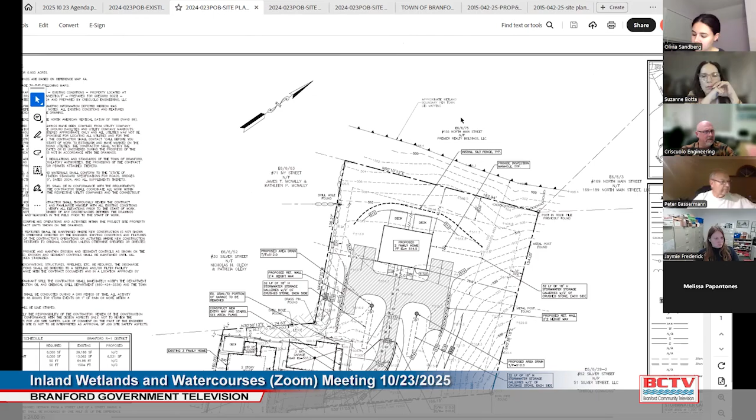The wetland is off the property, down at the bottom of this hill. That's the Premier Subaru site, I believe.

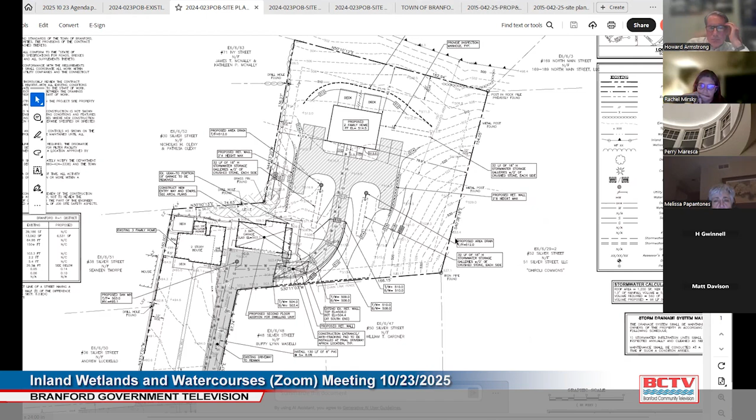When I was looking at this today, the house and the new driveway with those turnaround pads are built in the flat part of the area, and it looks like the surrounding terrain on both the west and east side slopes down to this area. So previously, when the garden was there and nothing was built, rain would go downhill and settle there, and now there'll be impervious surfaces where once there was infiltration.

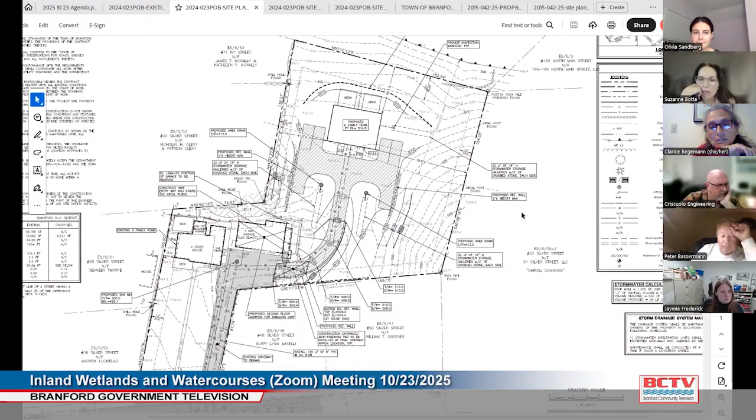I know you have the 3 infiltrators. My concern is just that there may be a little bit of increased runoff with steepening the slopes at the base before it gets to the driveways, and now that the previous garden area isn't absorbing water, there may be more water than before that won't be infiltrating much. Then you add the driveway and the roof. I know the 1.3 inches requirement is met, but I just have concerns about that amount of impervious surface there.

So this area, because of the slope—there weren't plans to remove all the trees up on the slope other than the one tree of heaven we saw. On this side, when you're looking at it, there's definitely a kind of ledge that goes up, but when we walk down in here, this property really slopes to the back, so it's not getting much of it. There's a stone wall here acting as a quasi diversion, so yes, there will be some water coming at us, but most of this will remain vegetated, so I don't think we'll get tremendous amounts. This was kind of a saddle, so some water was already going to the north and some to the south.

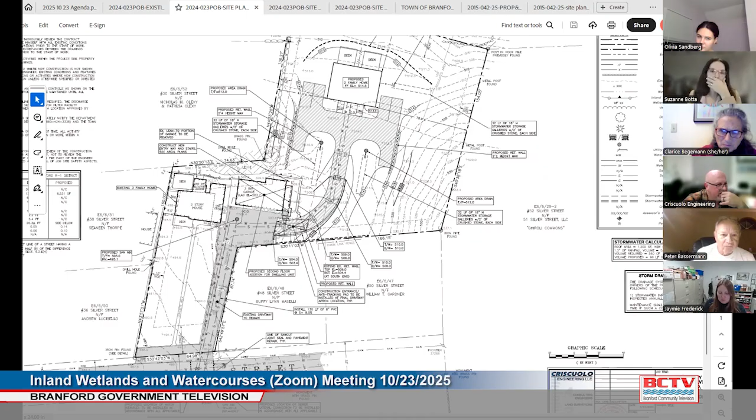As a follow-up, Commissioner Bassermann, is that the way you want to leave it, or are you thinking about something else? Well, now that I'm looking at these photographs again, I think I'm going to convince the owner to fix the gutters on the house, tie in the garage, and put something in the front yard over here. I just have to verify where the existing sewer lateral comes down from the house, but this is all lawn, so there's an opportunity to put something in, like an infiltrator situation, because I don't know how it hasn't been a problem, but eventually it will be a problem going back into the foundation.

Mr. Brady, this is Commissioner Botta. Going back to the northern part of the site - the silt fence that I'm assuming is the limit of disturbance, is that right? Yes, so after construction it's removed. There's two lines: a dash line past the silt fence, and then a heavier black dash line on the right corner that says post in rock pile. That's the property line - that's what I was going to ask. Correct, this dash line is the zoning setback line.

So I'm wondering if there is anything planned to ensure that the folks living there don't go beyond that - of course there are our regulations, but not everybody knows about them. There's not an intention to put a lawn or anything since you said this is the limit of disturbance, but I'm wondering if there's any other indicator that that's meant to be the limit of clearing.

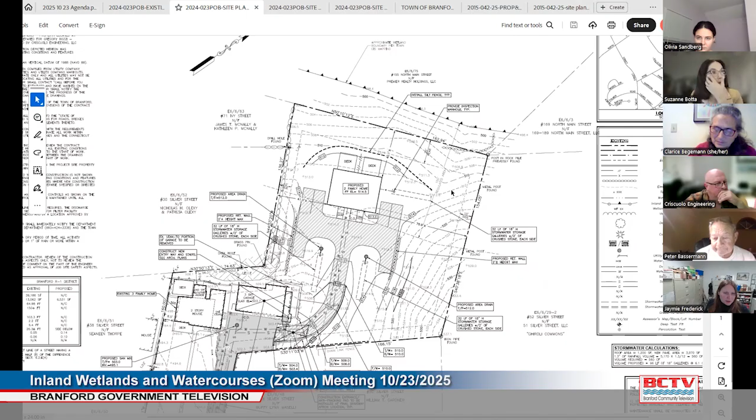I did have a comment in my staff report about the fact that no stockpiling was shown on site. I would add that stockpiling should be located somewhere other than where the infiltrators are proposed to be installed, just to make sure we don't end up with soil compaction.

I did not think to ask the applicant previously: has there been any infiltration testing on site, or do you know if those areas are likely to infiltrate? We have not been on site with any kind of equipment yet.

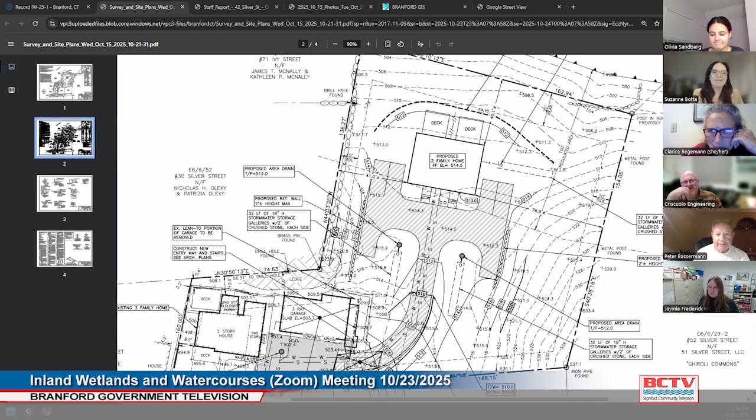You're not going to ask me how I know that? Mr. Peretti, this is Commissioner Botta. How did you know that off the top of your head?

So I'm sure most of you remember Don Blue. He actually went up to Tilcon and got 5-gallon pails of every different size stone and filled them up, measuring the amount of water that would fit in the pail to see that it was in fact the same regardless of the size of the stone. The difference was negligible. Awesome, that's a nice fun factoid.

This is Commissioner Bassermann. Jamie, is there anything in the staff report that you had prepared that might stimulate any other questions, as it looks like there's going to be a revision here.

Jaymie Frederick, the Wetland Agent. I guess the only comment was that we have the calculation for the 1.3 inch water quality volume, but we do not have stormwater calculations through the 100-year storm. That's not a default requirement for all applications, that's triggered by section 7.8 of the regulations. I got a comment from the town engineer stating that if the commission is requiring this for this application, he'd be willing to review it. So if you think it's required, we should let the applicant know. It's not a standard requirement, but one that we certainly would require for larger developments and larger impervious areas.

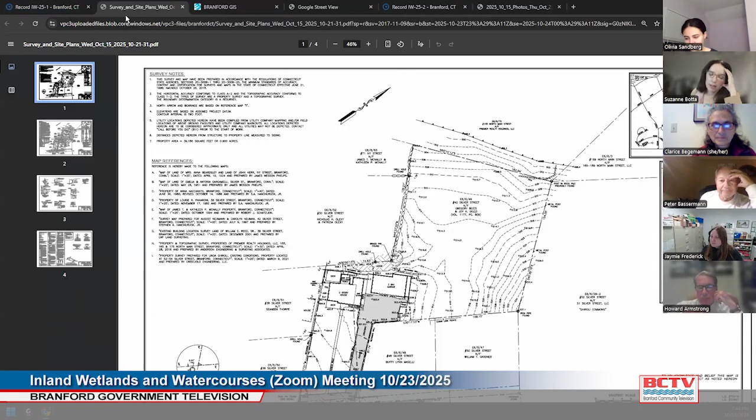Jamie, this is Commissioner Botta. As you're doing that, it's actually kind of helpful that we see you doing that, and maybe your thought process as you're looking for stuff. One question is, are those fields always in the same order, or are they in the order in which things were added?

That's a very good question, and it's kind of neither.

Generally speaking, some of the file types only populate when they're applicable, and some of them always pop up. Authorizations always pops up if the application was submitted via paper or if the applicant is not the owner of the property. Site development plans is always required, so you're always going to see that, near the top. Same with project narrative, it's always required, near the top. Property survey is always present as an option.

I didn't make it required because sometimes people lump all of their plans with their property survey in one spot.

Exhibit list is always there, but it's only used if we use it, usually on public hearing applications. Wetland report, again, always there. Drainage—so most of these, yes, they're going to be in the same order.

And if there's no file uploaded, that means nothing was uploaded to that location. If we add any additional things—I'm still kind of working on some of these. Now that we're actually implementing the system, I'm realizing some of them should be renamed. Like we don't need site walk photos and photos separately, so I'm just going to make one photos location.

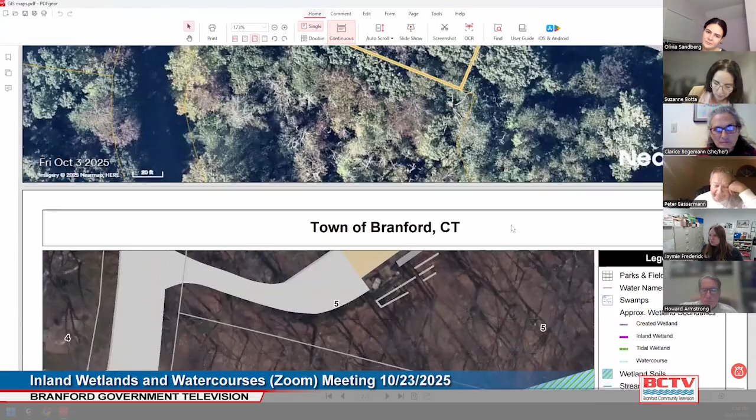Here's an aerial image from October of this year, pretty recent. You can see the lot is very well wooded. Next image from our GIS showing the NRCS wetland soil layer, which is obviously approximate. The house and the driveway in question to be repaved. I don't think this is a driveway. When I was out there, it was all vegetated. It looks like historically it's been disturbed, but it was vegetated when I was out there.

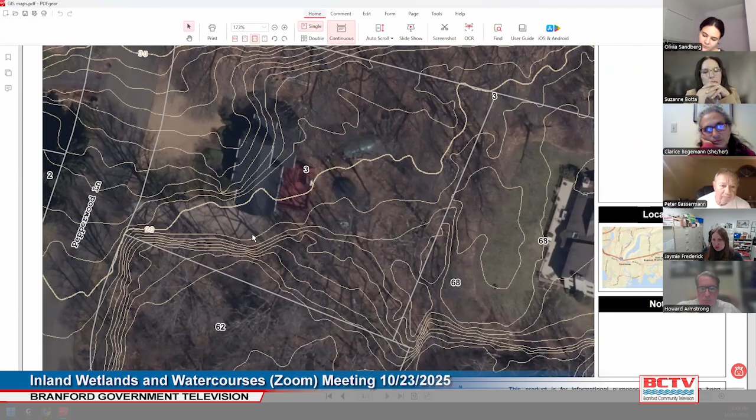So this is the driveway, and these are the 2016 contours. It does drop off fairly steeply. There's no space for them to put in stormwater improvements. It is an existing driveway. The level of impervious is going to change, the material obviously of the driveway is going to change. I don't really see much they can do to mitigate the change. So I kind of wanted to get the commission's feedback.

This is Commissioner Begemann. We know that the surface that's there now is better for the wetlands than a bituminous driveway. But what is our role in this case if a homeowner wants to put in something that we know isn't as advantageous to the wetlands that are right there?

Jaymie Frederick, the wetland agent. Generally speaking, I would look for some sort of stormwater improvement to at least improve the water quality, like maybe a vegetated strip, a rain garden, a bioswale, something to offset the change. There's really no space for them to do that without bumping out that slope and directly impacting the wetland. So it is, I think, a unique situation.

This is Commissioner Bassermann. Jamie, can you put the picture of the driveway back up? And the width of the existing driveway is what? Approximately, based on this, 15 feet wide at the front and then 28 feet wide in front of the garage.

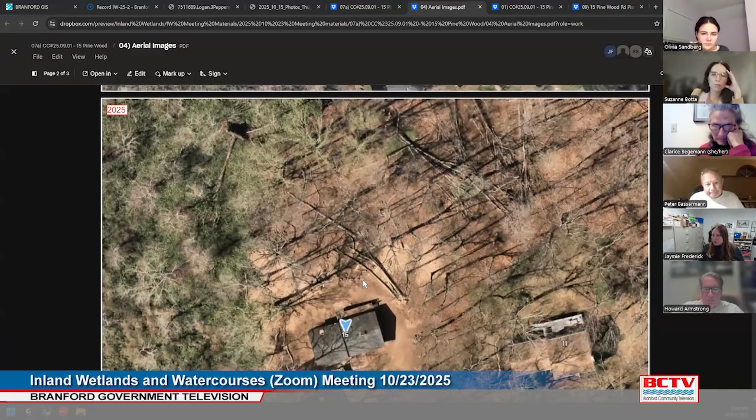Subject property, 15 Pine Wood. I believe this is from 2024, and then this was April 2025. You can see that there was some site disturbance, and here you can see some of the trees that were removed. The wetland is located to the west, off to the left in this photo.

I'm going to jump to the planting plan and show that. Then, unless the commission has any specific questions for me, I'll hand it over to the property owner to add anything they want to add.

I'm going to skip to the photos. Here you can see the silt fence at the limits of activity. Clearly they didn't clear cut up to the silt fence. They left mature trees and even some of the understory vegetation, so it's not a bare dirt scenario for the full length of the limits of activity.

I don't know if you'll be able to see it here, but there's a reference to a pink flag on the wetland boundary on the right side of the picture, which honestly I'm not sure I'm seeing right now. Oh, right here.

So here's the sketch markup showing the wetland flag locations and the approximate silt fence location. Approximately between, I think, these flags identified further up. There's just a little bit of encroachment into that wetland area.

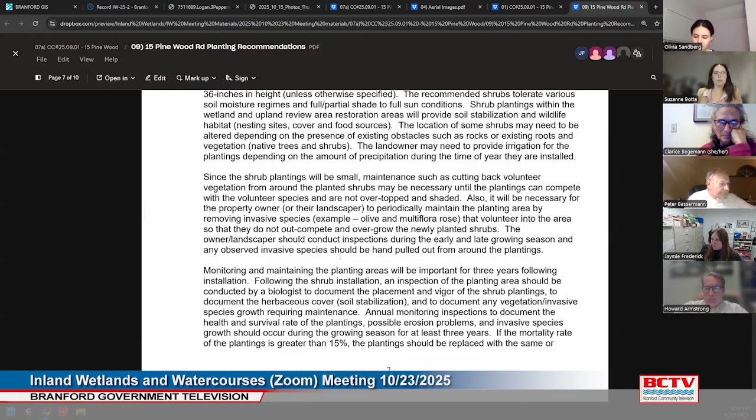So I'm just giving you the quick high level. The recommendation is to plant 8 shrubs within the disturbed wetland area and an additional 22 shrubs in the disturbed upland review area, as depicted on this sketch. So again, the silt fence, disturbed wetland area is where they're proposing to put, I believe, 8 shrubs, and then the additional 22 in these blue areas between the existing trees, along with a list of species. I believe it said all shrubs should be 36 inches in size at time of planting.

Commissioner Begemann: Does the person who recommended this, didn't she in her report also say that the wood chips have to be removed? Yes, she recommended the removal of the wood chips in a way that doesn't disturb the soil, and she also recommended the removal of this material here.

Commissioner Bassermann: To that point, the recommendation was to remove the fallen trees. Are they of a size that can be done by hand as opposed to machine? I think she mentioned branches, and I think that just to help facilitate being able to plant those areas...

The trees that you could see in the first aerial image were already being cut up in the upland review area. Further, actually, they might have been outside the upland review area. This one definitely would have extended into the upland review area. I think these ones are outside - they're more than 100 feet from the wetland. Those were already either removed or being removed, and I told the property owner that they could continue to do that work as long as it didn't cause additional disturbance.

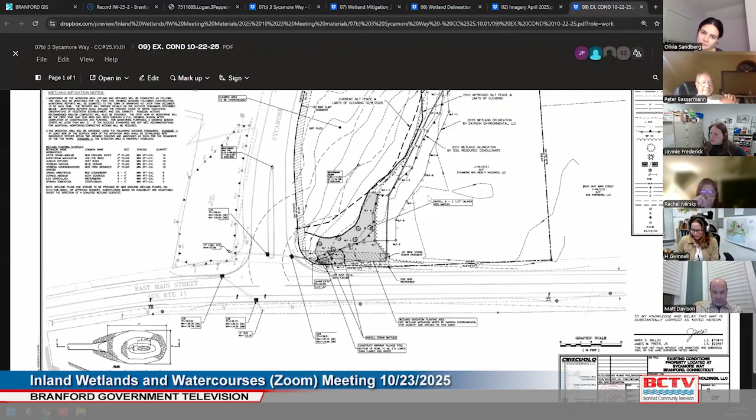Okay, so this is the updated plan. Do you want to start with that or with one of your reports? Yeah, the plan is good because we incorporated all basically the notes from my plan into this sheet, so that the contractor has everything in front of them.

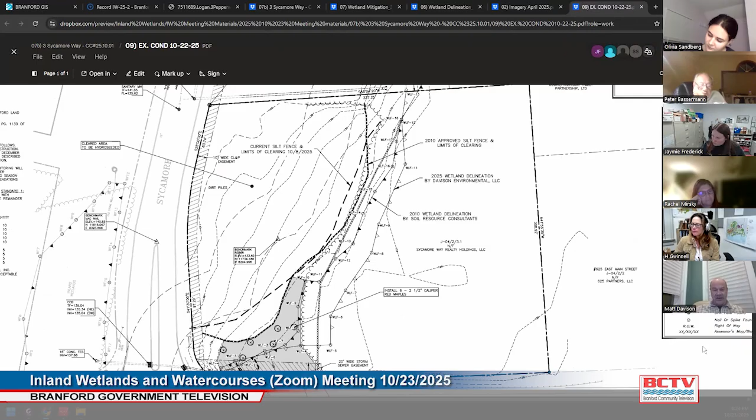So as Jamie stated, I was asked to delineate the wetlands on this lot roughly 2 weeks ago. The clearing and site work had been done when I came in to delineate it. The area where the tree clearing in the wetland occurred was in a wetland finger that's on the very northern end there. It's basically a wetland finger that runs along Route 1 up towards Sycamore Way.

It sort of terminates up near a pipe outfall that is directing both stormwater from Sycamore Way as well as discharge from a wetland that's across Sycamore Way there that Jamie's highlighting. If you look inside the basin that discharges directly to this swale, it looks like the discharge pipe's elevated somewhat, so it's not persistently flowing, but does appear to flow after rain events or larger events. I'm guessing there's some flow in there in the spring. When we were out there, there was some surficial movement from that outfall down towards the finger. Most of what was moving on the surface was wood chips and organic debris that was on top. There wasn't really any soil movement that I deciphered.

So our mitigation plan addresses a few things. The mitigation plan is shaded there, so that's the area that we would assign the mitigation requirements to. The mitigation plan includes planting in the wetland finger area. Within the wetland finger, I was proposing 50 wetland plugs, which are small so they're easy to put into the wetland substrate, as well as 20 shrubs. We also added, when we did a site walk, 6 red maples just to the south of that wetland finger. Each of those is shown, and they would provide some shading for southern exposure to the wetland.

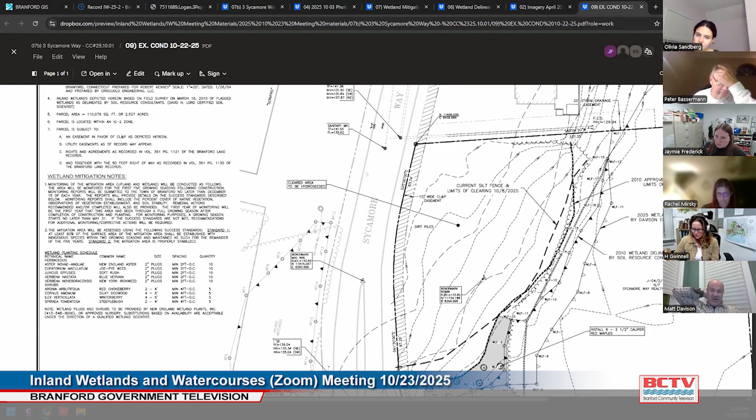Another monitoring success standard is soil stability. As I stated, this area receives direct discharge from that outfall, and this finger is on a terrace slightly above the wetland below it. If you follow this wetland finger, when it hits that stone wall, it drops a few feet before going into the wetland — the topo doesn't show it well.

In terms of attenuating sediment, I don't envision an erosion issue here with what we're proposing, but being in the path of a flow from a stormwater outfall and the discharge across the way, there is potential. So in the spring I'd want to check a few times after snowmelt and rainstorms to make sure there's not an issue, and that the erosion controls installed over the next couple of weeks are still intact.

And I think so, that's about what I have.

This is Commissioner Bassermann. I guess the question is, do you believe there's enough hydrology from that discharge during the summer months, July and August, like we had this year with pretty good drought conditions, for those plugs to survive?

Yeah, because it is a wetland — I was getting wetland soils up almost towards that pipe outfall, so there is wetland hydrology in there. The soils are silt loam too, so they're a little heavier. Silt loam soils make it easier for hydrophytic vegetation to take hold because of the water retention capacity. So I think they'll be fine.

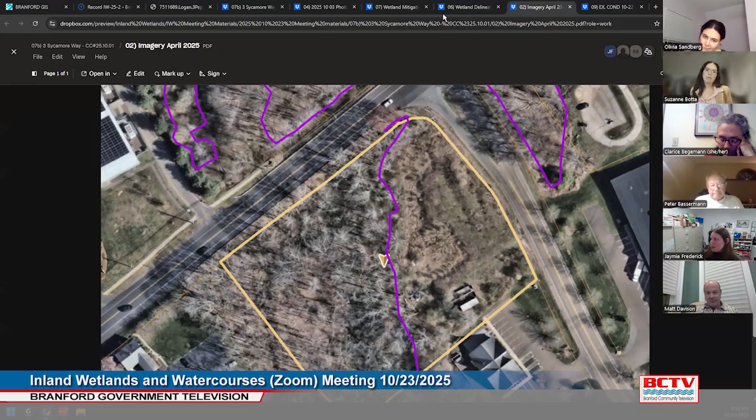I have to admit, I've not been by the site recently. I didn't really take pictures of that part, but this is the wetland area that was disturbed. You can kind of see some of the tree stumps of the trees that were removed in the wetland area, and then here's the silt fence.

I didn't take a picture of that, I just took a picture of the well. But I'm pretty sure Heather took a picture. Let me see, Jaymie, I just put a ton of them on the server under the address, from my most recent visit, which I think was 8 days ago.

3 Sycamore Way. All right, so here's one picture showing where the water is flowing from the outfall after a storm event.

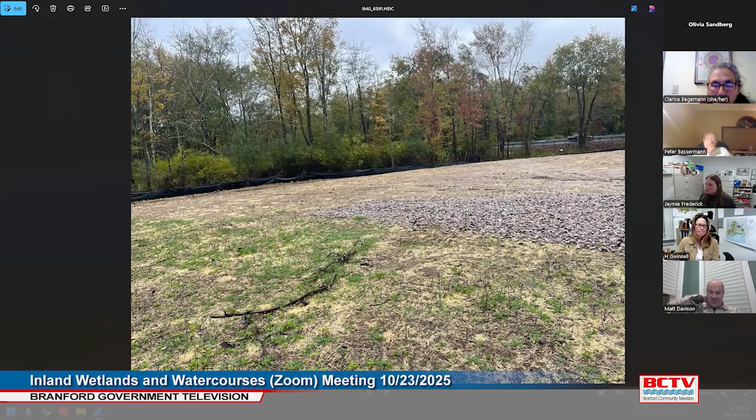It was seeded in mulch, but it wasn't taking very well. So we had a discussion in the field about hydro seeding, which I would strongly recommend, and it seemed like the property owner was on board with it. I can follow up with him to see if that's been scheduled, but I think that would be the most effective way to get that area vegetated quickly, and it's an optimal time right now.

This is Commissioner Bassermann. Is that the only modification to what we looked at in terms of the report? Seems to be, right? Jaymie Frederick, the wetland agent.

It's not an application, but I will note that for mitigation on an application, the commission looks for 85% survival. They're proposing 80% native species. I don't know if you want to bump it up to 85% native species to keep it in line with what you would require for a permit. I do think allowing them to count volunteer natives, particularly if they are having a robust invasive species management plan and plan on hiring somebody to routinely take care of that on a schedule, seems like a good metric for the monitoring standard.

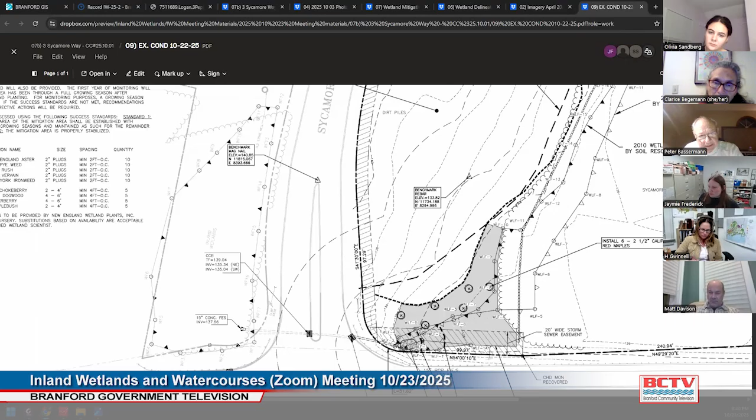This is Commissioner Bassermann again. Then is the only modification on this particular cease and correct, the reseeding of the area identified in whatever that picture was, subject to an 85% survival rate? Jaymie Frederick, the wetland agent.

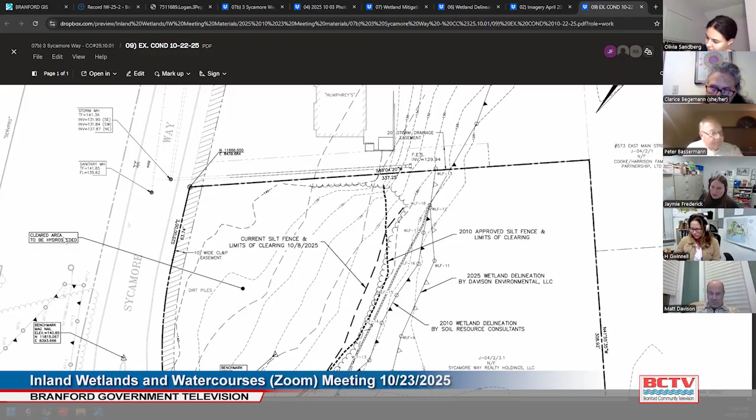I think it would be completion of monitoring for the plan dated 10/22/2025, along with establishment of vegetation within the area. It says clear area to be hydroseeded - maybe specify hydroseeded this fall in the area above the silt fence currently installed on site. I do have one clarifying question before the commission moves forward with a decision.

As far as the plunge pool work, would all of the regrading work be above both of these straw wattles, or is there additional regrading proposed below the plunge pool?

I don't think Jim had any regrading proposed below the plunge pool. He called out the wattles, I think within the flow path. Right, that's what I assumed, but I just wanted to make sure the property owner wasn't looking to define a channel or anything like that.

Although we can see from the picture, there does appear to be a channel. I wouldn't recommend doing any work in that area. You're just asking for trouble, and there's already a defined flow path there that's been essentially in equilibrium for a long time. It wants to follow that path, so I would leave that alone.

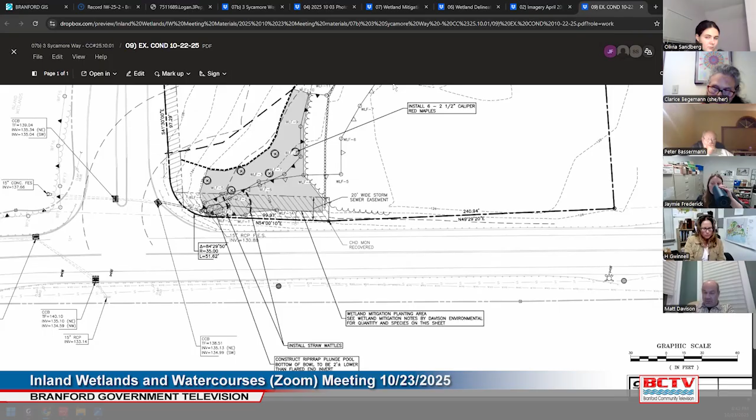Not a question for you per se - okay, I was wondering if there were dimensions for the plunge pool. It looks like we've got 14 feet long and 8 feet wide, with a 2-foot top to bottom depth.

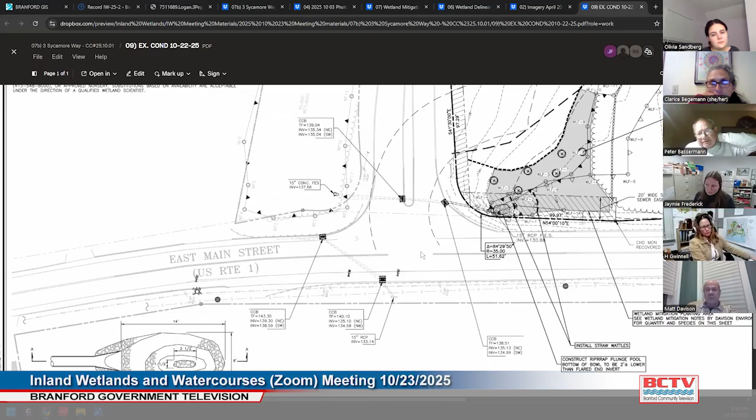This is Commissioner Bassermann. Mr. Davison, is the area to be hydroseeded identified on the site plan here? It would essentially be everywhere within the silt fence. That's pretty much everything that's been disturbed, with the exception of a gravel track or stone tracking pad placed on the road frontage there. Gotcha.

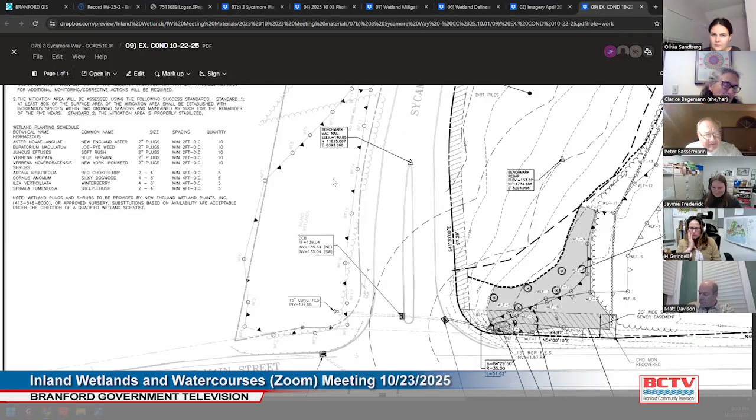Does any commissioner want additional information regarding the 3 Sycamore Way mitigation plan submitted on October 9th? Commissioner Bassermann: does somebody want to make a motion regarding Cease and Correct 25-1001, 3 Sycamore Way?

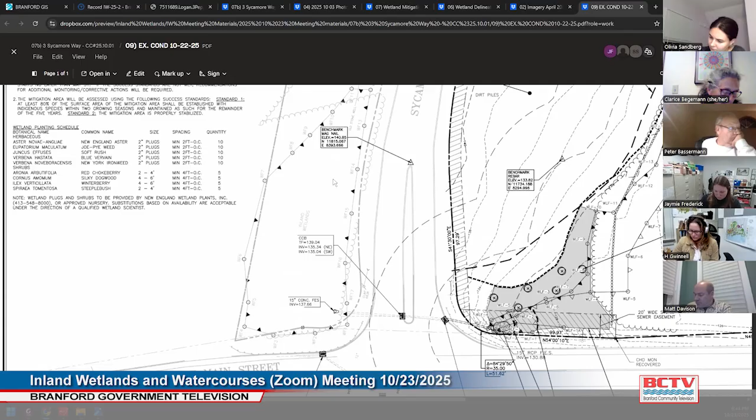This is Commissioner Begemann. I'll make a motion that we uphold and modify Cease and Correct 25-1001, 3 Sycamore Way, according to the planting plan discussed 10/23/25 as prepared 10/22/25, with the addition that the cleared area above the silt fence is to be hydroseeded this fall.

This is Commissioner Bassermann. I think we wanted a survival rate specified. This is Commissioner Begemann, with the addition that the monitoring for 5 years will require 85% native species success.

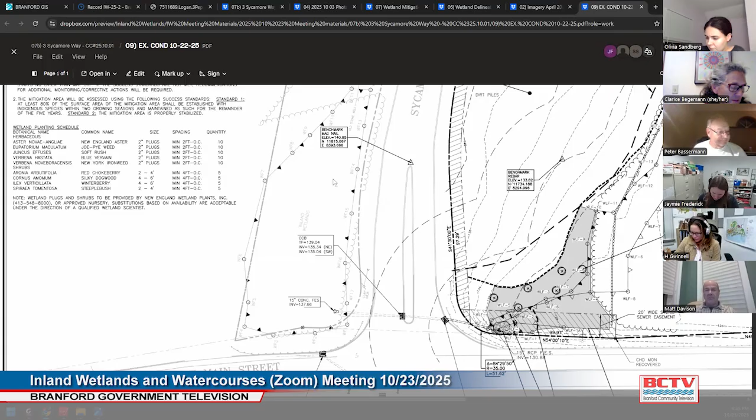This is Commissioner Botta, second. Any further discussion? Okay, let's take a vote. Commissioner Mirsky, aye.

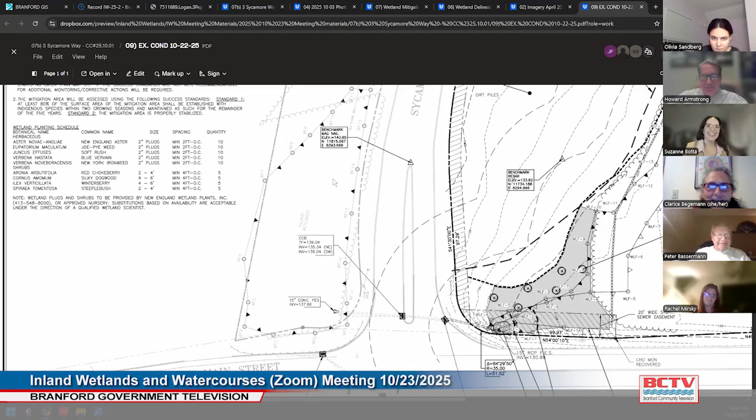Commissioner Armstrong, aye. Commissioner Papantonis, aye. Commissioner Botta, aye. Commissioner Begemann, aye. Commissioner Bassermann, aye.

Jaymie, I think you had something under discussion of schedule that you wanted to talk about. Oh no, we'll do that in November. You can do that in November? Okay.